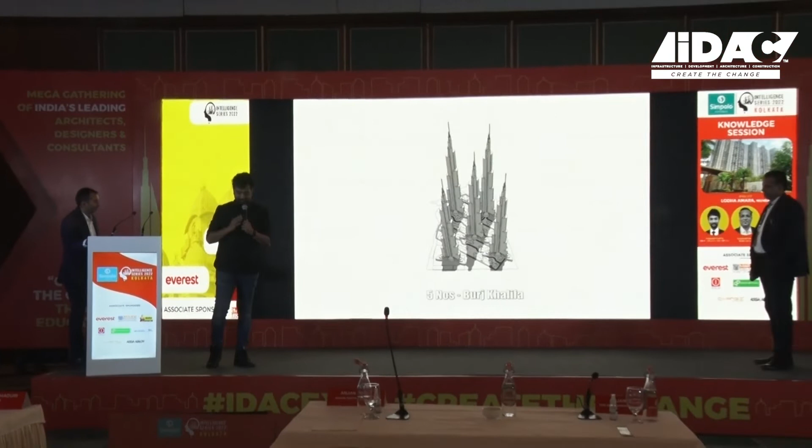We started this project in 2015. The Lodha brand is always known to give a lifestyle. You know about the World Towers, but that's a different segment. Every segment deserves the lifestyle. This is a project of our CASA brand, which means around 1 crore value. It's in Thane city, and for a better lifestyle you usually have to go 6 to 8 kilometers from the station. This is in the heart of the city. We thought every class needs the lifestyle. The price range is 75 to 100 lakhs.

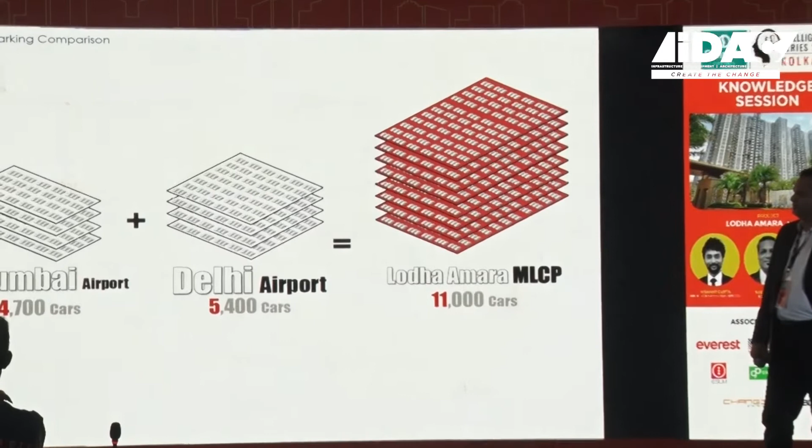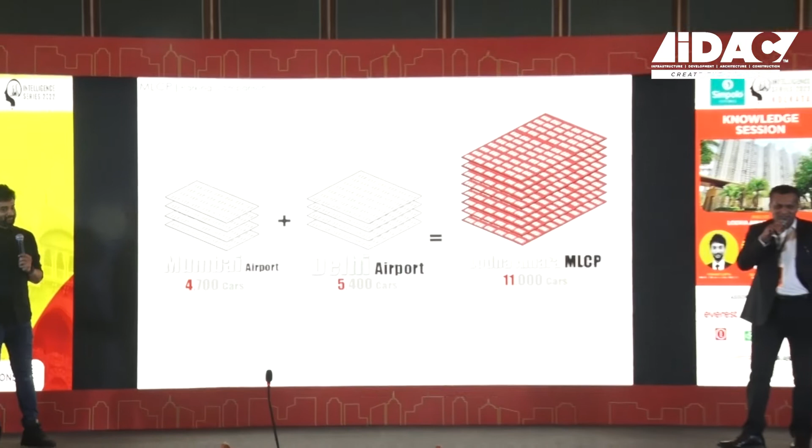Talking about scale, the car park building of this project has 11,000 cars. That is more than the car parks of Mumbai Airport and Delhi Airport put together. These are big numbers, but talking about it is one thing, doing it is another. And we gave Nishant a challenge: we can't do any basements because we want to deliver this project in 3 years. So it has to be MLCP. We don't want to dig. It's a call for ESG also.

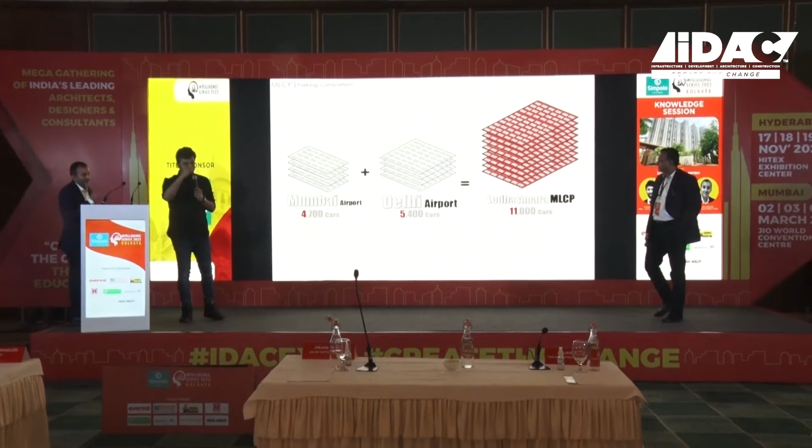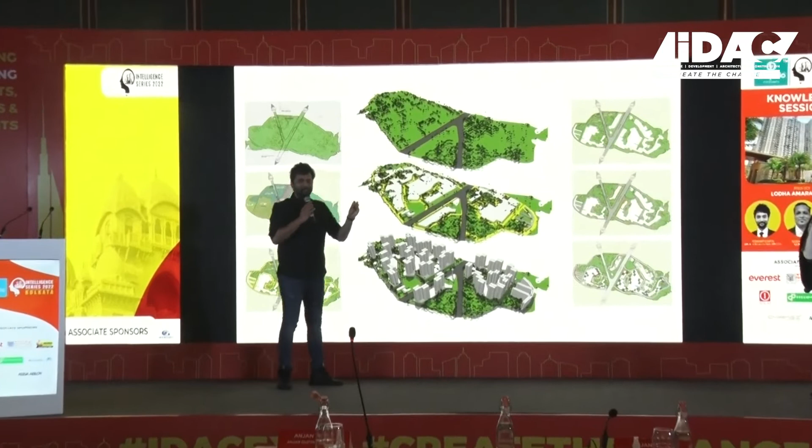Yes. So if I quickly take you through it, we got the site, which was 72 acres, we got the survey, and a brief on the type of apartments required, and we mapped it.

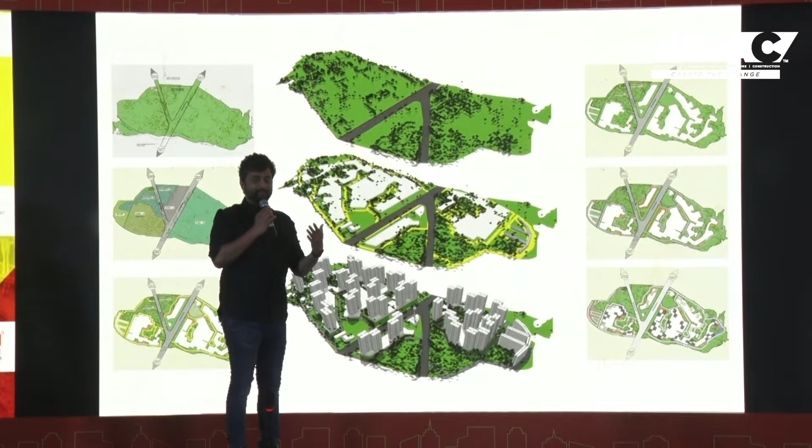Okay, these are so many trees, and the first thing that comes to your mind as an architect is the sustainability of the environment, and we want to save all the trees. Then we start getting the podium in a profile so that we don't cut any tree. Then we start placing our buildings over it, do the networking, do the drop-offs, do everything, and then show it to the client.

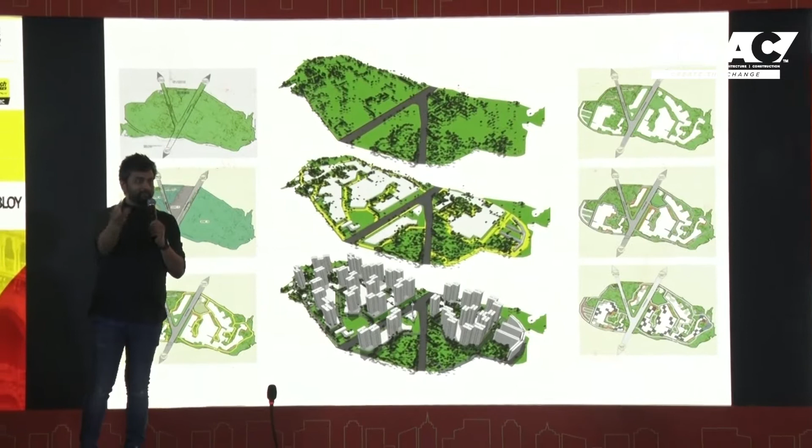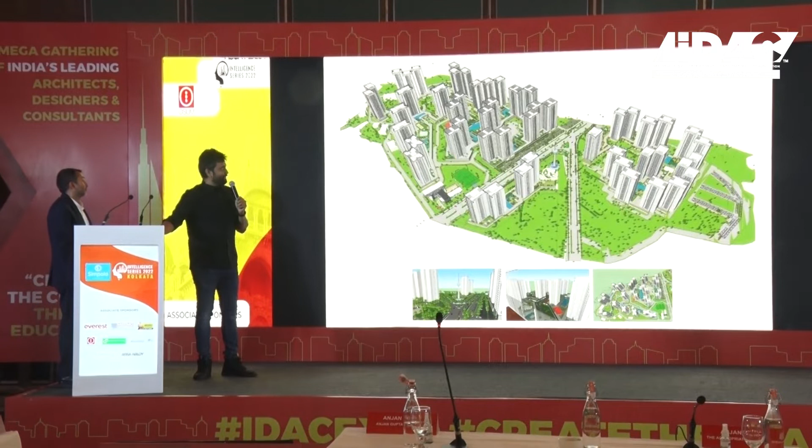We get to know the survey was slightly incorrect. All the shrubs and everything were also shown as large trees. And then it was explained that we need to work around the actual survey, and there were not really that many trees.

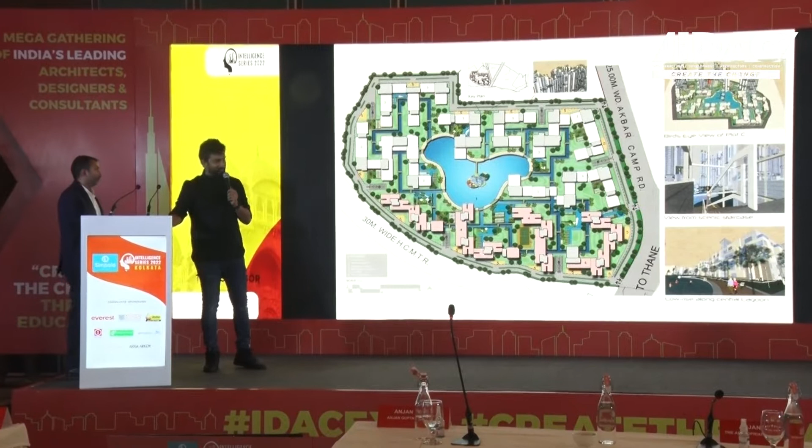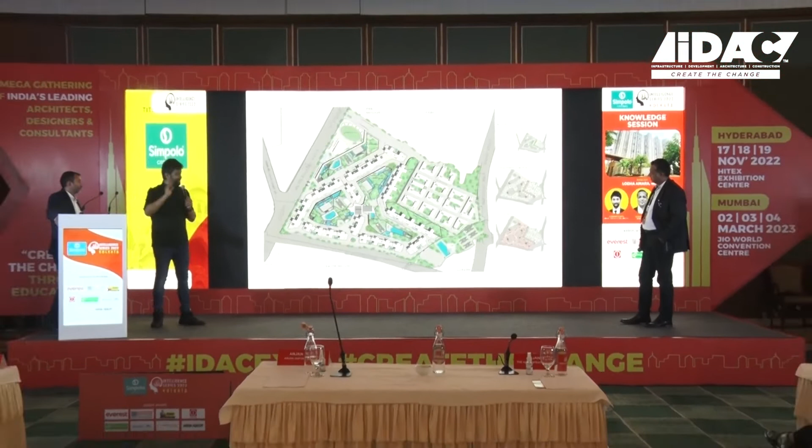Then again, we go back to the studio: okay, let's do something landmark, let's create a Venice, let's get a lot of water, because we got another brief that one sector, the smaller sector of the bigger project, should be luxury, lifestyle and all. Again, that was kicked out. Then we go back to the studio again: okay, now it has to be affordable housing. How do we do it?

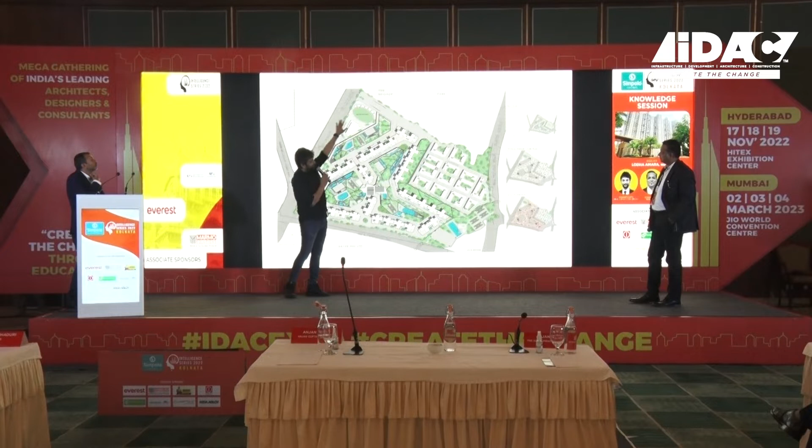Then we make 3 clusters. We have the car park building right in the center. We had an army camp on top, so there was a height limitation in this area. And then there was a social housing component to the affordable housing component. So that's how a market works. So this was the initial plan. Efficiency, everything, open spaces, I think we were fitting very well.

The remark we get from the client is, who's this architect who's done this, who watches a lot of Star Trek? Let's go with straight lines and do things which are relatively faster. And these were the initial ones. So eventually, as Sushant mentioned, delivery has to be in 30 months.

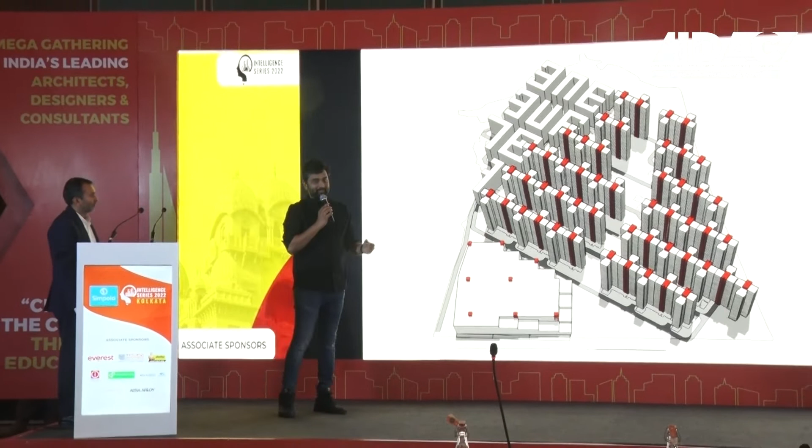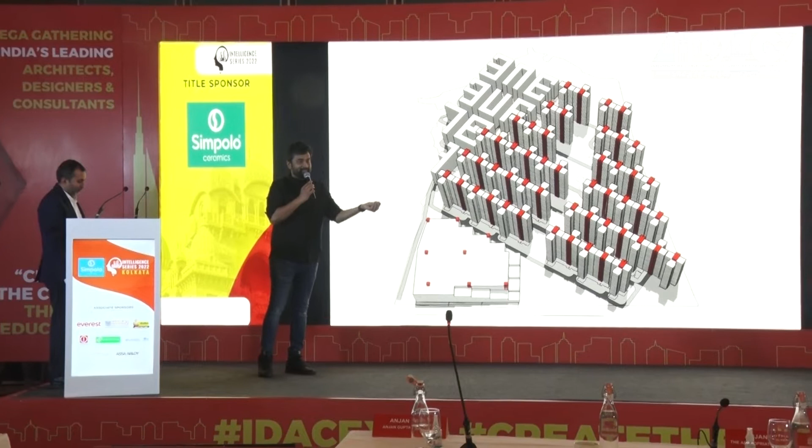Now, when delivery has to be 30 months, things have to be slightly different. The reason why I showed you the previous option is that something that got built is not the immediate response as a design; it is a process, and then there is acceptability. And sustainability is not just what my ego suggests. It's ultimately sustainability of economics also, besides social and environmental parameters.

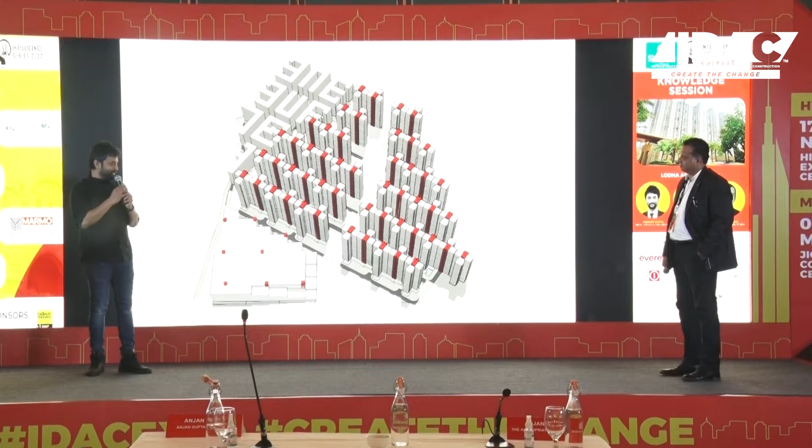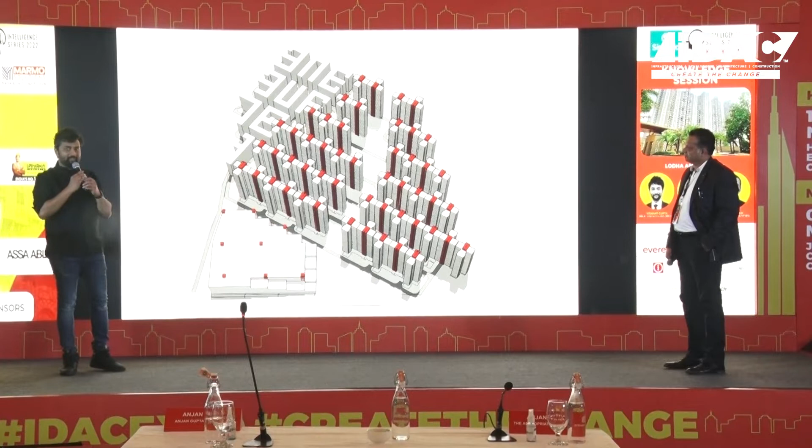And the idea was the construction has to go fast, there has to be repetition. We have to use the lowest part for the car park, and then we start building up. Buildings are 150 feet apart from each other, wherein one can see the other person, but they can't recognize the face. Then what happens is the social component goes.

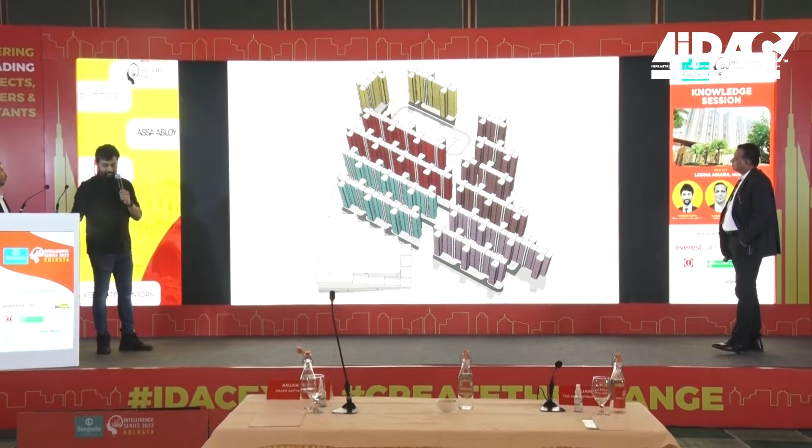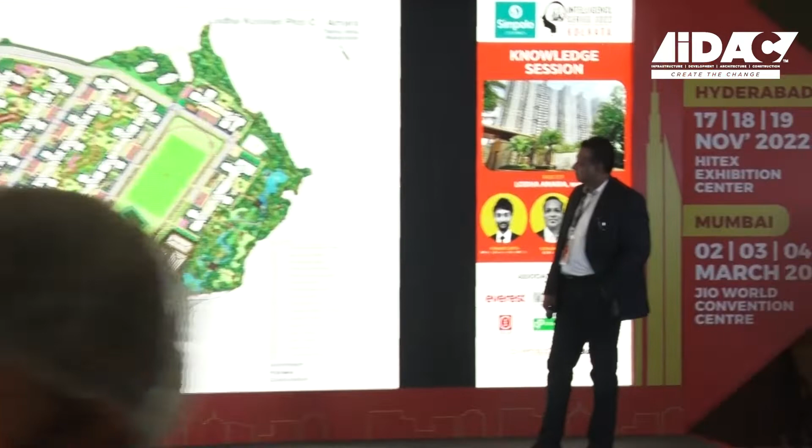The moment we grab that opportunity, we try and create an open space in the center, and then we create something like this. And then try and get the greens inside, opening up into the larger greens. And that's how ultimately the master plan came about, and everything got signed off.

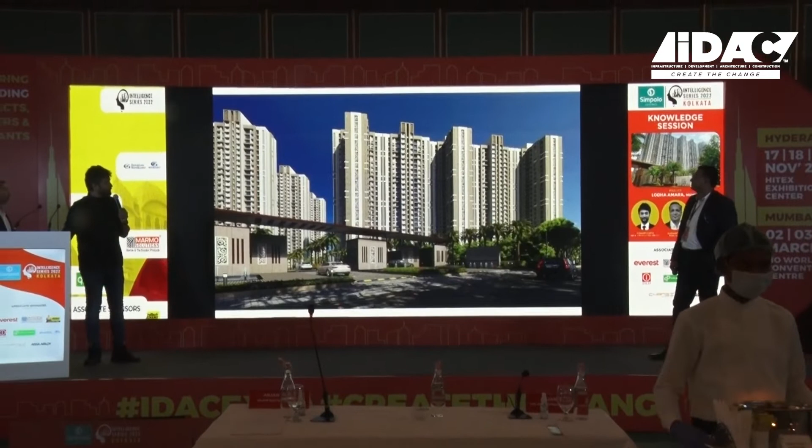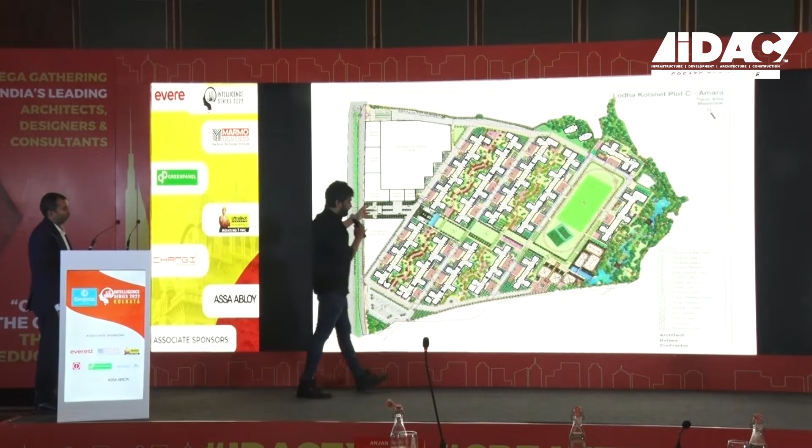And then what we thought was that we would also create a forest at the fag end of the project. We wanted to create a large 50,000 square feet club, which would be a break from this and would have a resortish feel. And this would extend into the CRZ land where we couldn't build, so create a forest.

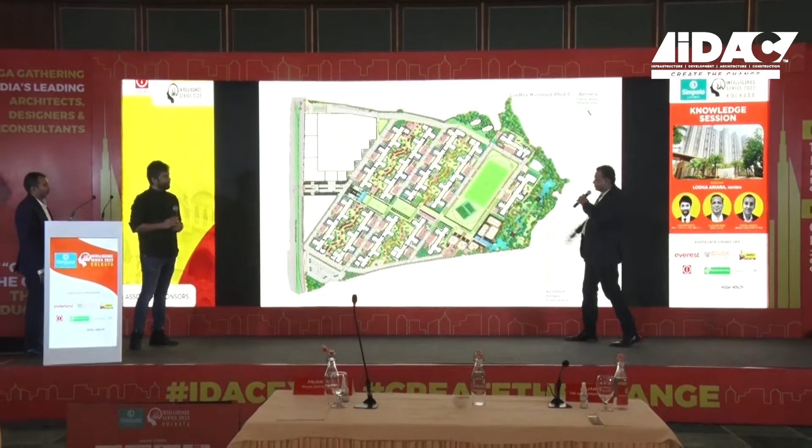So actually, if I talk about this forest thing, it's a great story. This is the land parcel which you see. This is 7.8 acres, and there were some trees because it was industrial land before. But we created a good landscape within the existing trees, and had some more trees planted there. And actually, we made it a big selling point: a forest inside your house. So you can just come and enjoy the forest.

And after COVID, if you notice, people now actually know the importance of these green areas. After COVID, after 2-3 months, when the restrictions were removed a little bit, people really enjoyed it, and we got good feedback from our HPM team from the Amara residents. Yeah. And all these buildings that you see are pervious at the ground floor.

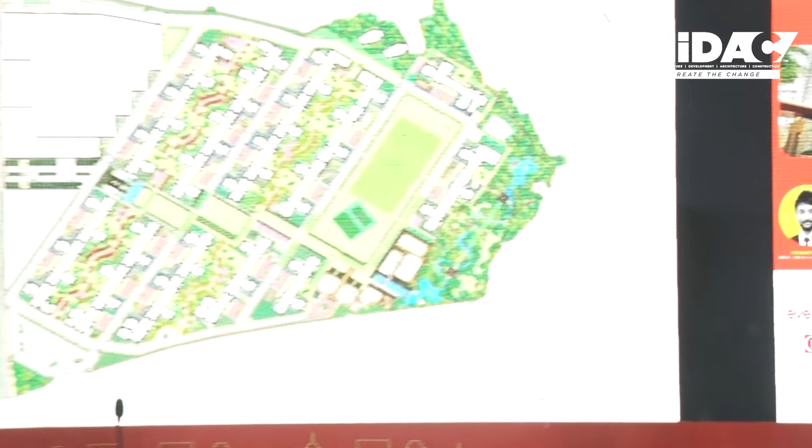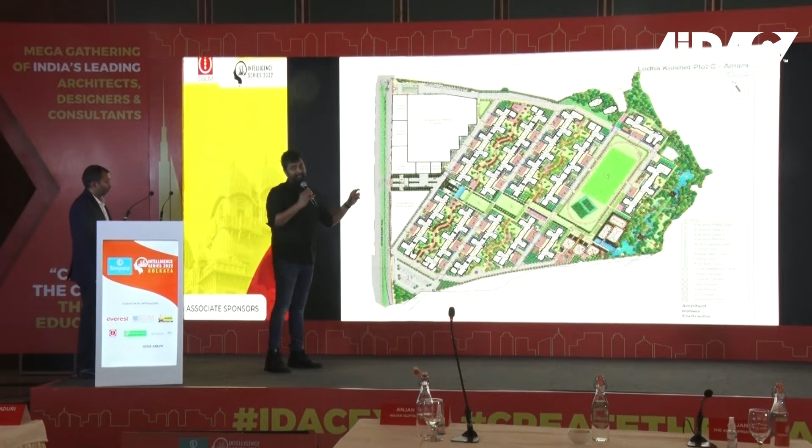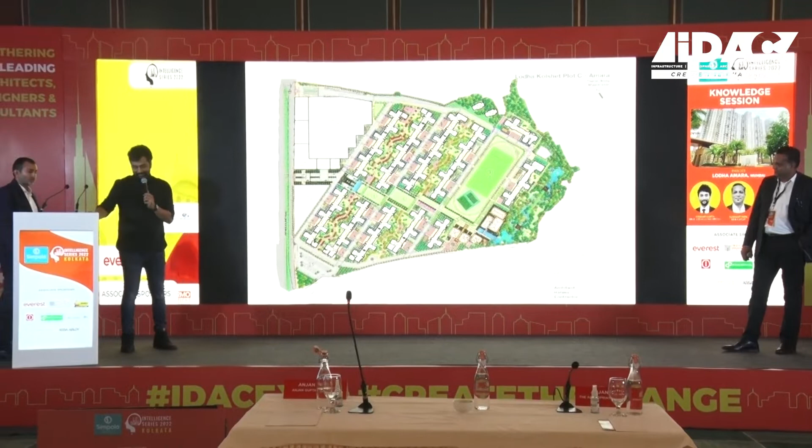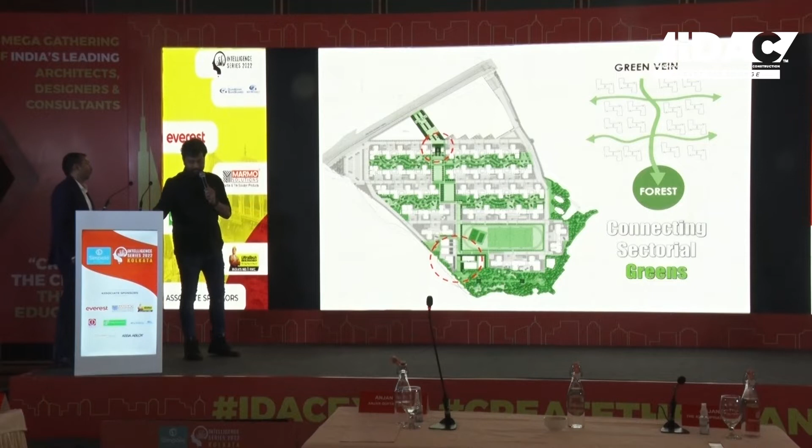You're left with a certain area, and that is when, where, and how, and what you do sort of defines the project. So these were some initial visuals. These were the last. So this is how we created the green vein going into each pocket. And then these were the pervious lobbies that one can walk from one side to the other.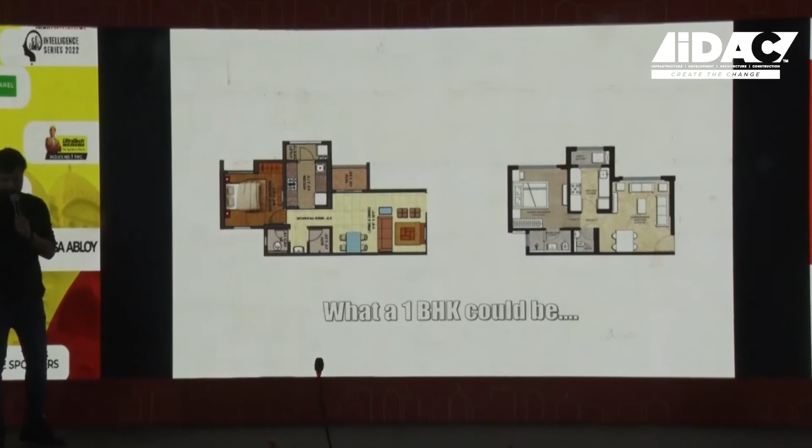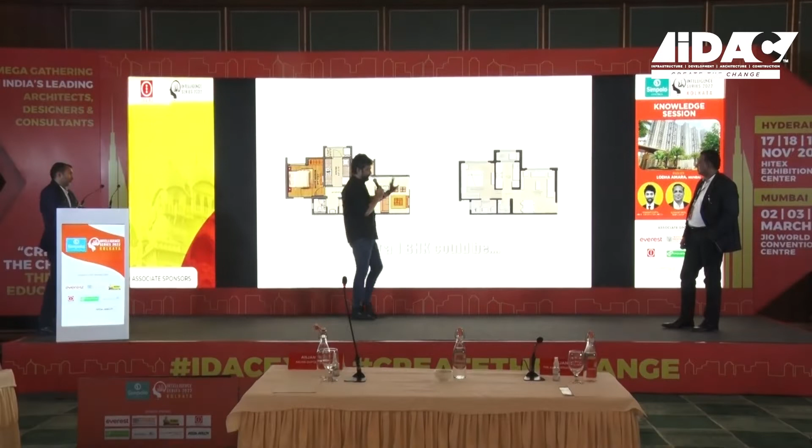So now, you come to a product, what a 1 BHK has to be. So in general, this is what we are talking in 2012-13, when we started designing. A 1 BHK used to be a 480 square feet product. 480 square feet, we brought it down to a 415 square feet, 400 square feet product, wherein we provided 2 toilets. This was the existing product. This is the product that we made.

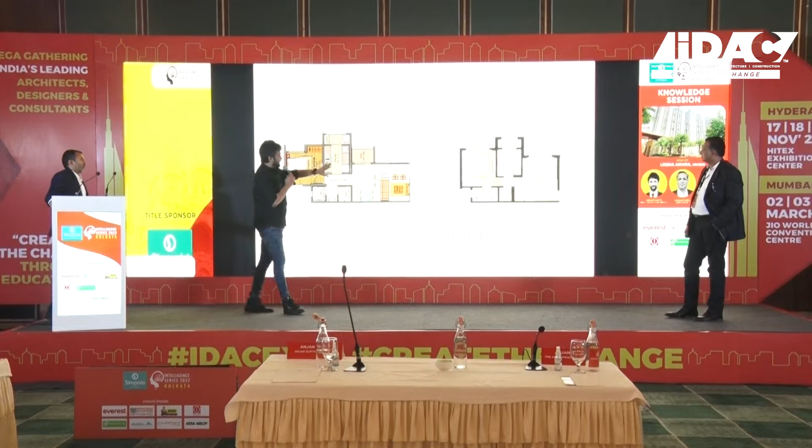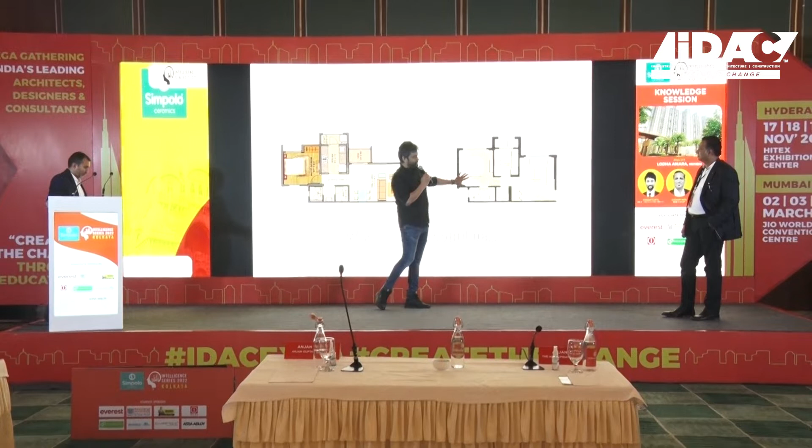Now, what would happen is that you load that extra 15% area. So a house, let's say, comes for 75 lakh. The same area, you get better room sizes, you get better utilization of space, and you get the same thing in 60 lakh. So that is the kind of intervention through design I think an architect can really give.

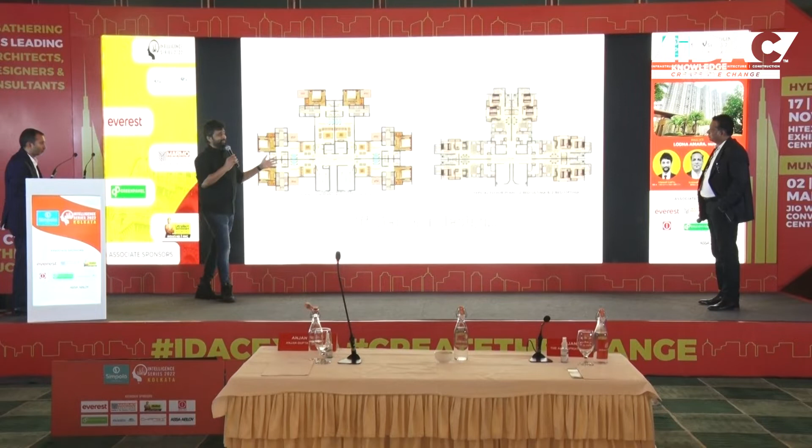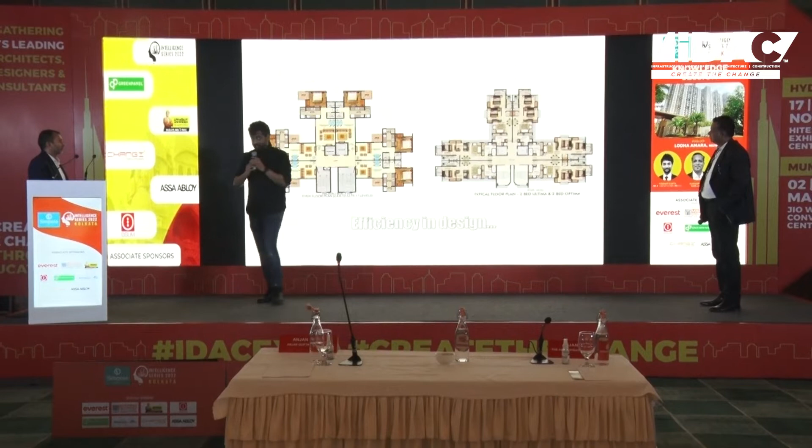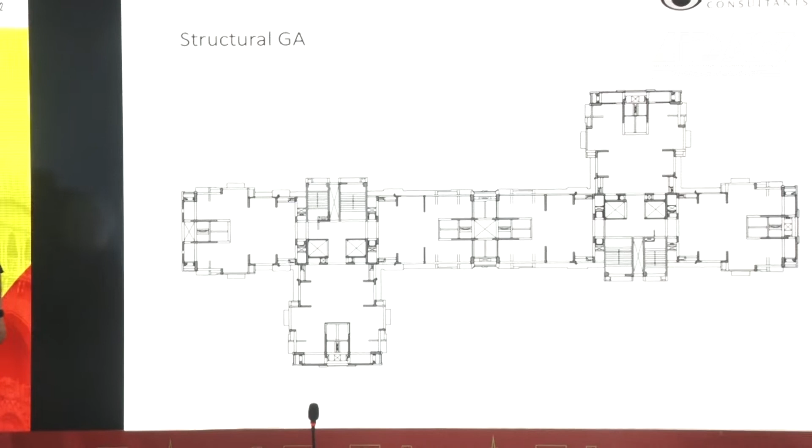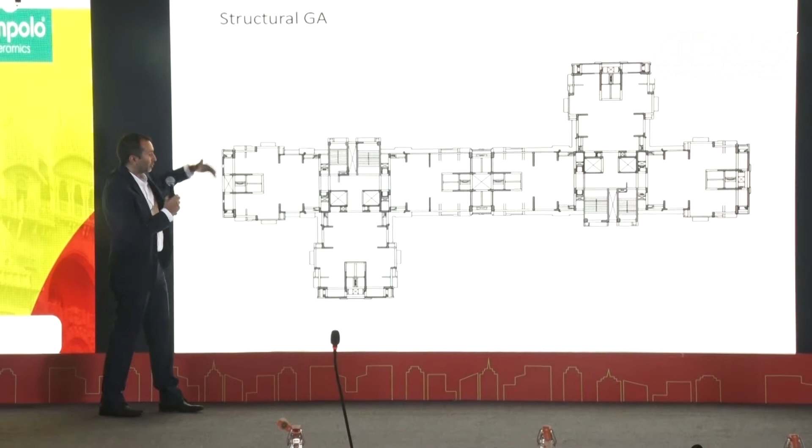So this is the structural plan of the building. Architecturally, it was a single T, but structurally, we had to join the T's to give it the base width, so that we could reduce the forces on the shear walls. This is the shear core of the building, which is a fairly rectangular core, and this helped us achieve a lot of efficiency. The client also wanted to create a flat which could be merged very, very easily.

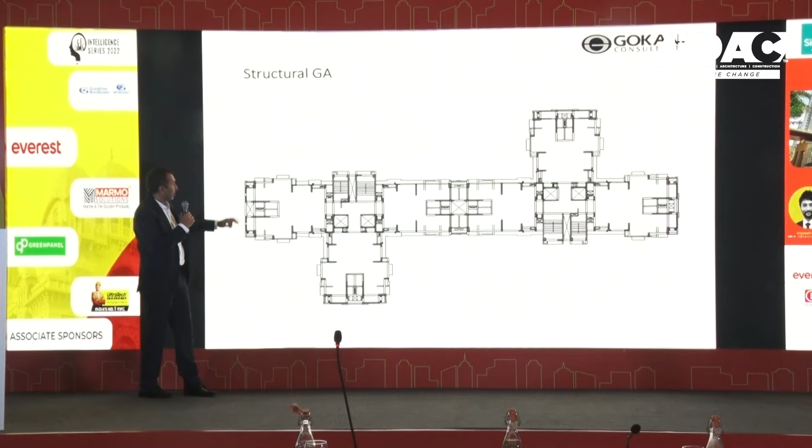Flat slabs are generally frowned upon in the Indian standards, but with the help of these beams, we could create kind of a pseudo flat slab, which is not really a flat slab, but it looks like a flat slab. And all these columns are just along the periphery of the flats. Even then, this dimension is about 4 to 4.5 meters.

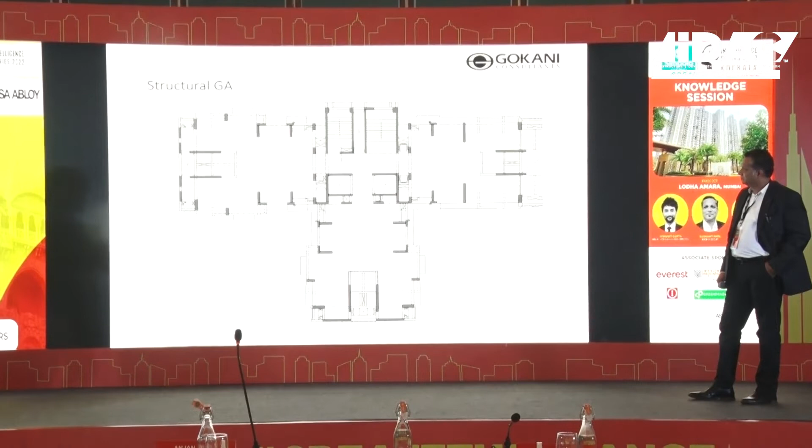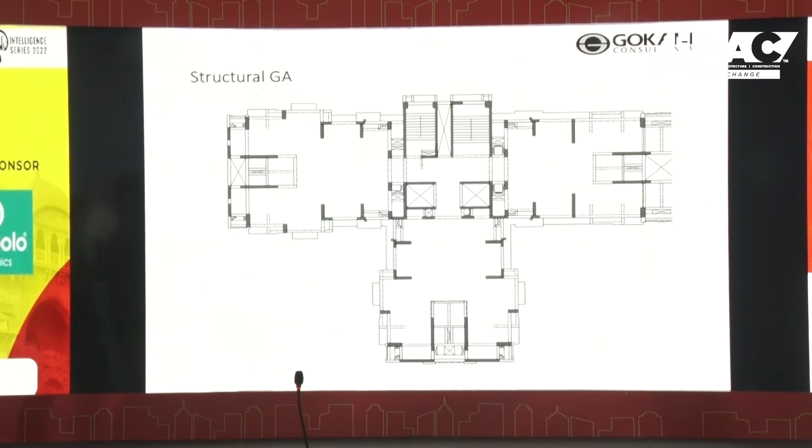So this is just the zoomed-in version of one of the floor plans, where you can easily see the structural system. These columns here are a part of the vertical load resisting elements, and only the shear wall core takes the lateral loads. Also what is happening is that previously, a T-shaped building is not good for torsion, as structural engineers, everybody understands.

But now we're getting a little more FSI on the existing FSI, so we're going for a more rectangular central core for the last few buildings. Nishant and his team helped us to get this very rectangular central core, which was the key to achieving the efficiency that we talked about. And efficiency not only in terms of cost, but also in terms of flexibility in the planning.

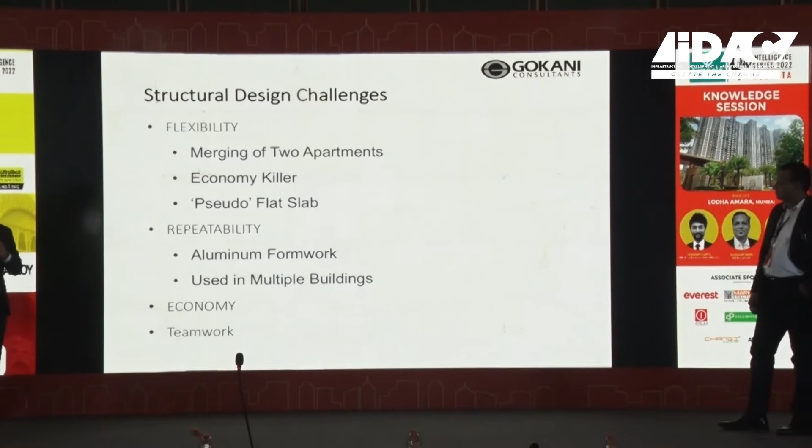And the other main important aspect was the repeatability. So how the buildings were designed was there was a central core, and there were different unit configurations that came together. And these had to be joined on the same core. So there were 5, 7, 10 different types of buildings structurally. And because of this kind of a planning, we could achieve that repeatability, and we could use aluminum formwork in a very efficient way throughout the buildings.

Well, flexibility and repeatability sometimes are economic killers, because you want larger spans. But with the help of Nishant and his team, we could achieve the economy. So I'll just run through how we achieved the economy. One of the most important aspects of achieving the economy was the structural configuration. As I earlier pointed out, even though the building is a T shape, we had to join the two inverted T's together to widen the base of the building, which would result in lower forces in the shear walls.

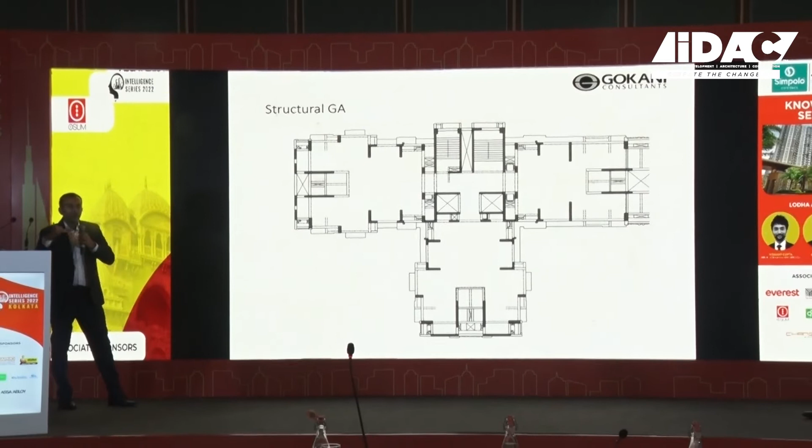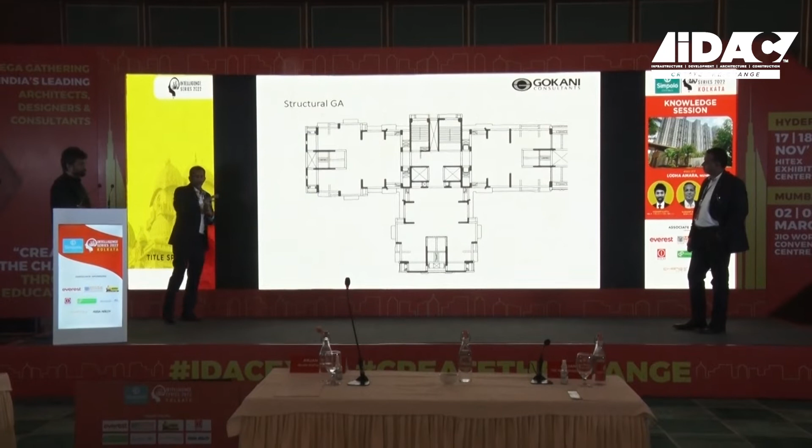The second important aspect is the shear wall massing. Just like massing is very important in architecture, where you place the shear walls in the building is very important. So if you take the shear wall core that we just showed you, and you just messed up the shear wall elements and placed them haphazardly, the building would have been much less efficient. Just because we could align this core and align these columns, we could achieve a very efficient way of placing these shear walls.

The other aspect was we fine-tuned the lateral load elements, which are the elements that take the wind and earthquake load. So we fine-tuned the elements so that nothing more than required was put in, and this required a lot of iterations and optimizations from our end. Lateral load elements require a lot of detailing with respect to RCC, which is again an economic killer. So we tried to use some gravity elements within the system which are penalized less in the codal provisions. They also provide you flexibility along the flats and reduce the column sizes over there too.

We tried to reduce the spans. If you see the layout, along the periphery, the spans are not more than 4 to 5 meters maximum. Even though it looks like a big flat slab, we could reduce the spans along the periphery and still achieve the flexibility. And we also optimized the concrete. In a 30-story building, we went up to as high as M50 grade concrete, and we could reduce the size of the elements and the reinforcement that we put in.

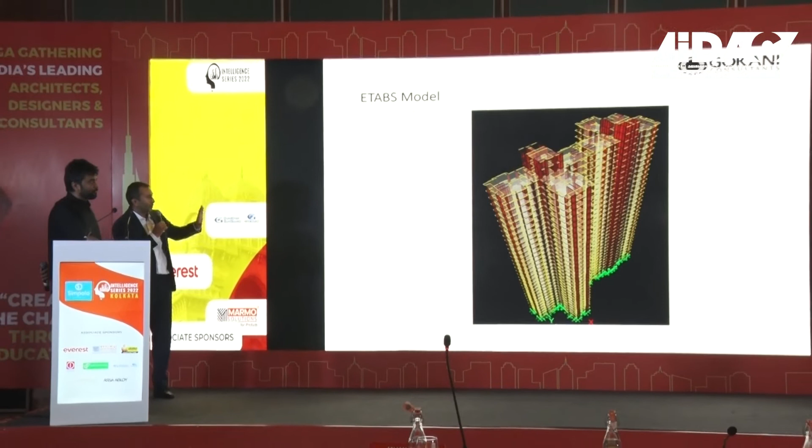And the consumption, taking into account all the codal provisions and everything, for a 30-story building came to 3.9 kgs per square feet or 0.033 cubic meters per square feet. So this is a fairly decent consumption. And this is the ETABS model that we used for the building for our optimizations, which helped us achieve the goals of the project.

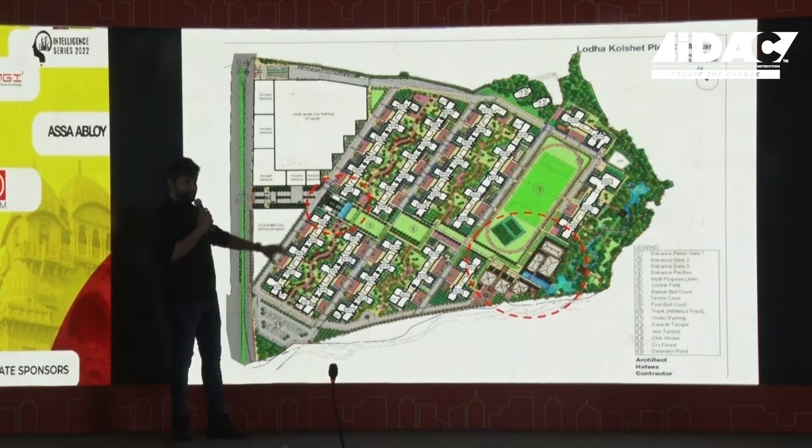So to maintain economy, everything was separate, in the sense one set of contractors was given one row, another set was given another row. We had the underground water tanks 6 meters away from the building. So there's a separate contractor doing the water tank, a separate contractor doing the buildings, a separate contractor doing the STP. So every task was nicely engineered at the site, so that this whole mass housing project could be delivered.

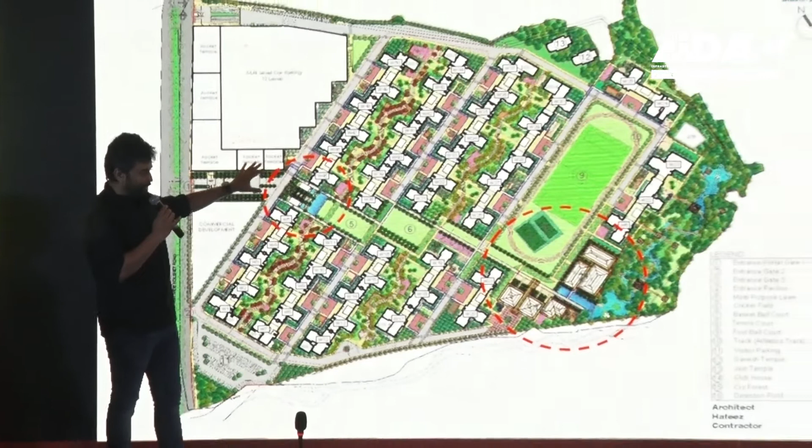Now, as an architect, you are then only left with the nodes that you could create for all these people that would come. And then we created a gesture here. We created a pavilion here. And then, like I was explaining earlier, a breakaway, a transition into the forest. We created a club at the end of the project. So as you arrive at the project, this is the kind of portal that we created, and now we are hiring an artist to get a suspended artwork into this gateway. This gateway takes you to that central green, and it extends into the overall project. And on either side, you have the buildings that you see.

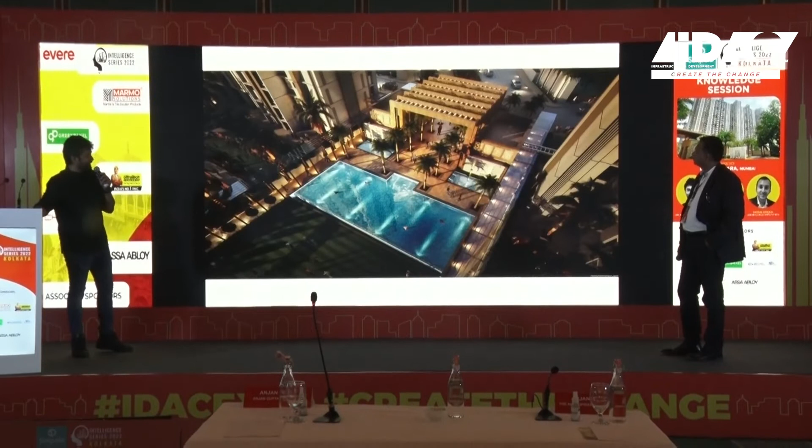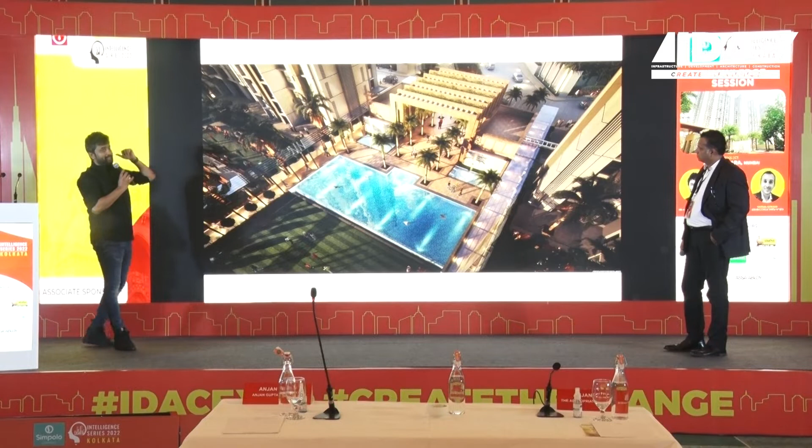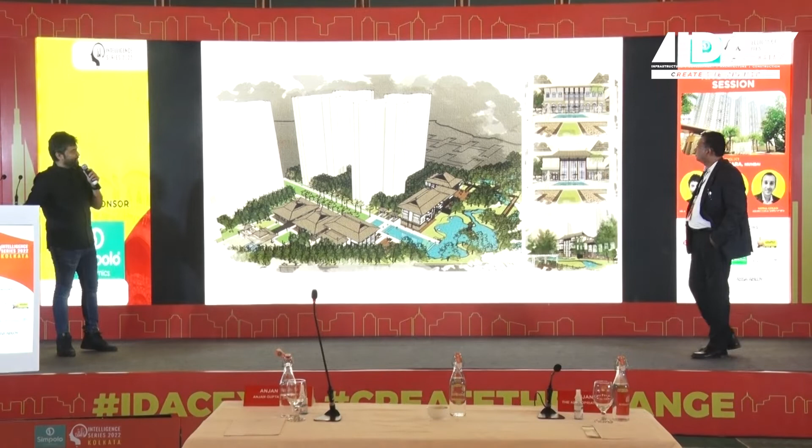Now this is when you see it from the central green side: through that gateway comes a swimming pool, and then the garden starts extending. There are covered walkways for people coming out from the car park building and going to their own residences. The maximum distance from the MLCP to your apartment is not more than 500 meters, which is a walkable 5 minutes. Then we tried multiple options of what the style of the clubhouse should be, and we discussed multiple styles of how we should do it.

And ultimately, this gymkhana kind of a feel got approved. And these were initial visuals of our ideas. And the finished pictures, I think I'll let Sushant scroll through. And then we created the idea of the overall project. I'll show you the visuals, how we perceived it, and how it became.

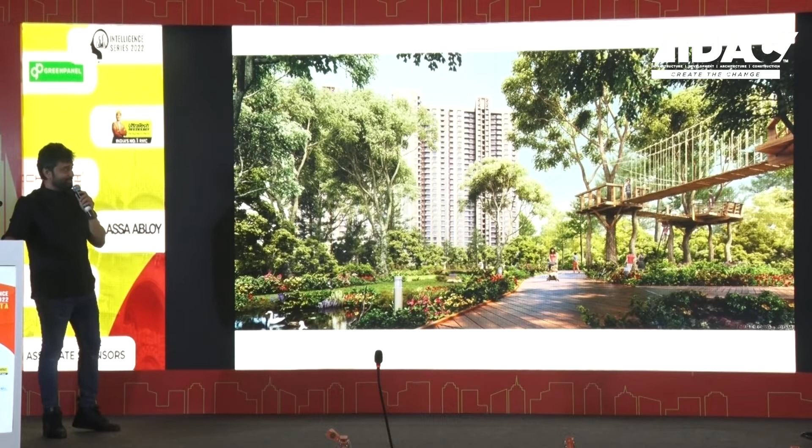I think we wanted to create trails, forest trails. We wanted to create tree houses. So it's a real immersive forest that we have created. So these are visuals, and then we'll show you the ultimate picture. So with all these visuals, we went to Abhishek Lodha's office, and we made a fantastic presentation. Everybody's charged up.

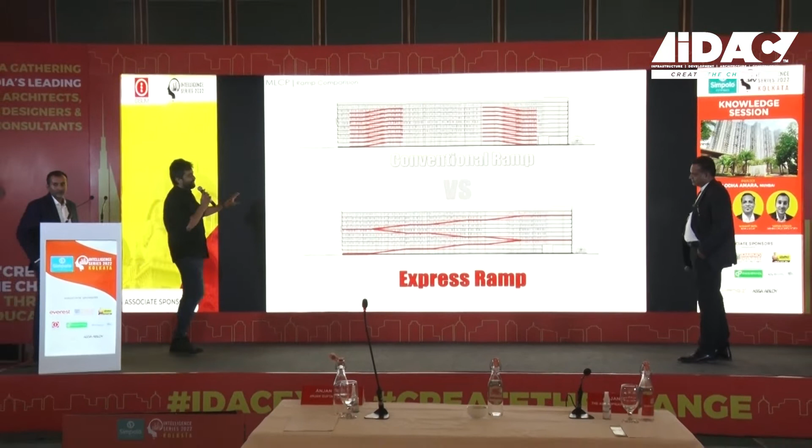Last, I think I'll just cover a very interesting aspect of doing a car park building, which is that we are talking about a massive building. Everybody would be wondering that you have a 12-story car park building. Now, imagine Bombay, people are adapted to going to a 10-story podium, but each time you sort of keep swirling and go up. So you'll be like, okay, boss, I don't want to go up. I might as well not have a car.

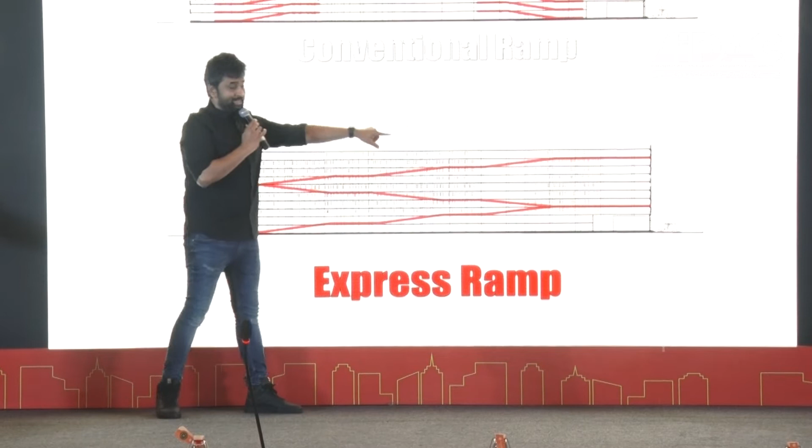So here we devised a technique wherein we had the length. So as we entered the project, we made an express ramp. So you'll go one level up, get into it, go second level up, get into it, go to third level up, take a turn, go 3 levels up again, and then go 3 levels up again. So even if you're parked on the 12th level, you'll only turn twice. So through that kind of intervention through design, instead of doing a conventional ramp, we were able to beat it. So this was, I think, a great feat.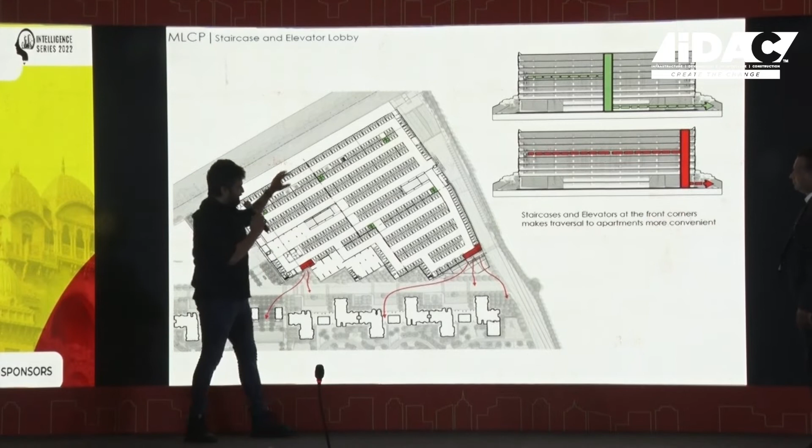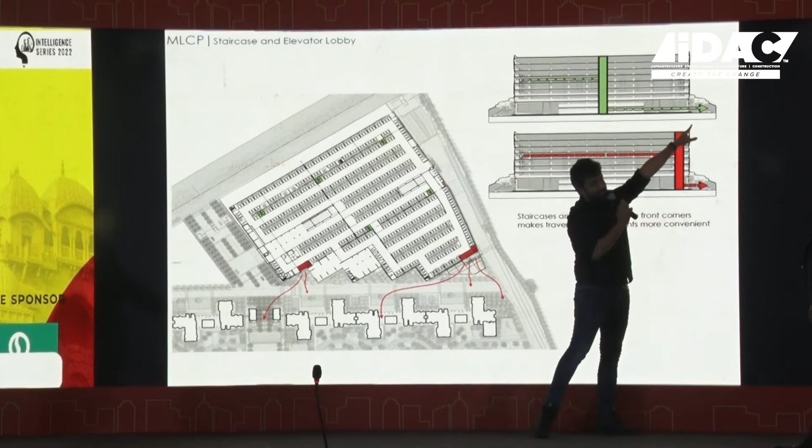The second thing, we convinced the client to have the lobbies at the end of the car parking building. There was a whole argument, we should have lifts just everywhere, lifts along the staircases. But one option is that you take a lift which is closest to you, get down on the ground floor, then again walk through the parking and get out. The second option is that wherever you park, you travel on your same floor, get down on the corner, and directly enter into the project. So you're not traveling twice in the car park jungle. Nobody likes that experience.

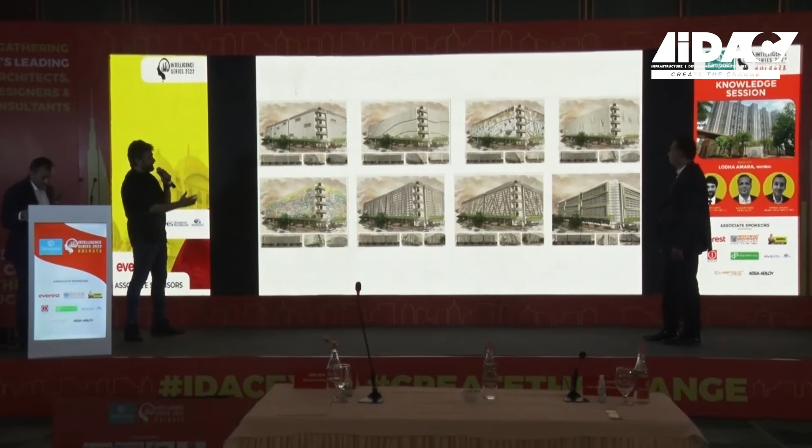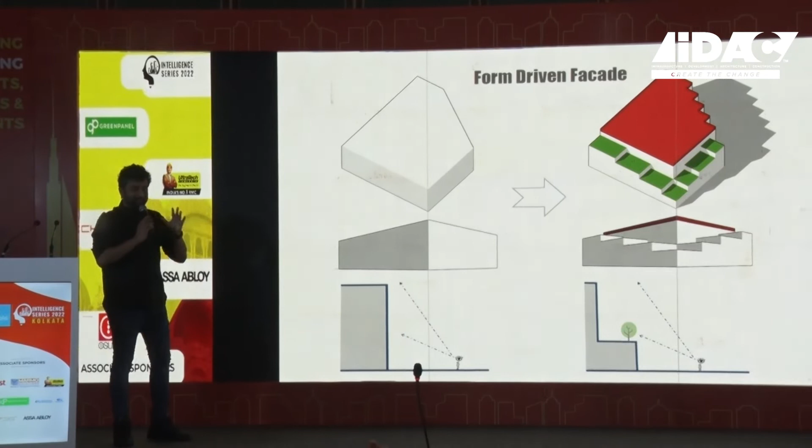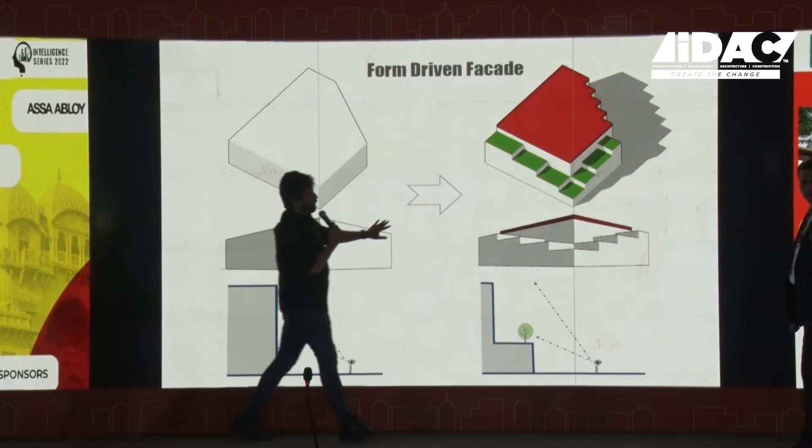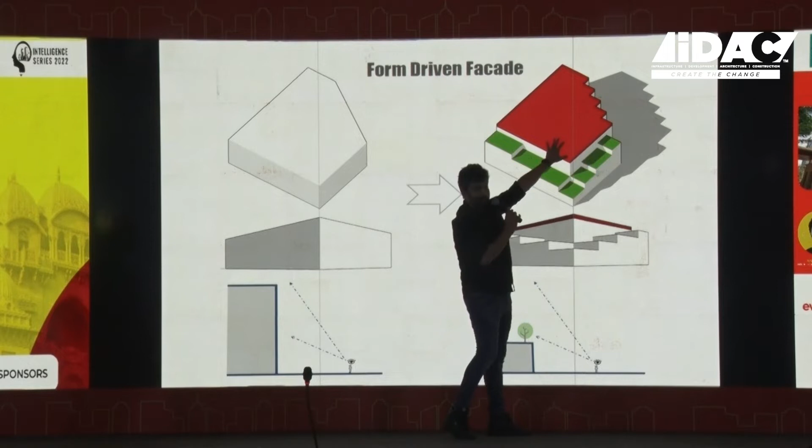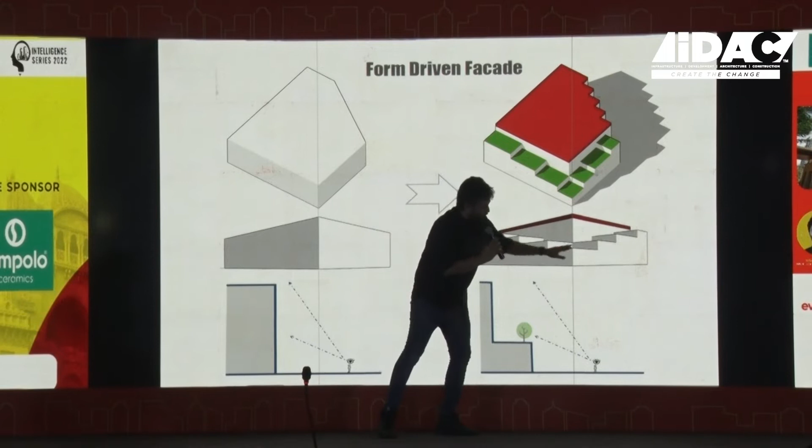So all we did was, can you let us make this kind of a stepping in the car park building? And whatever we have subtracted from here, we just add another floor. So in terms of structural engineering, his reinforcement is not really going high because he's just adding another floor, right? But at the same time, as an architect, I've got that soft form as I enter the project. So that is the intervention, as I was not allowed to do any facade treatment. That is the maximum one could do as a form.

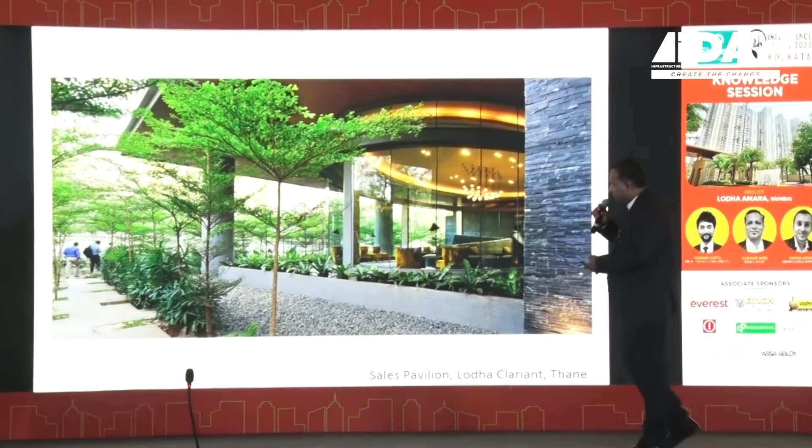And then lastly, we said, okay, let us at least have markers to see which floor it is. And you would see the soffits from below, a whole VIBGYOR of colors with that step profile. Over to you with the finished product. So this was a structure which was already there as an industrial one. We use it for our sales office.

Which one? Just the last 2 minutes. I think you can go next. I'll show you the actual pictures.

These are some show flats we did for sale purposes. This is the entry, an actual photograph. This is what you can see here.

We retained all the trees wherever possible on the periphery. We had a very subtle color palette. Next, this is the pool.

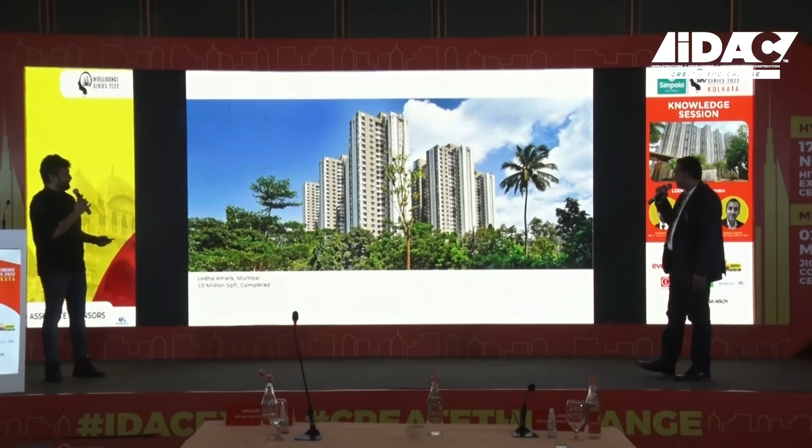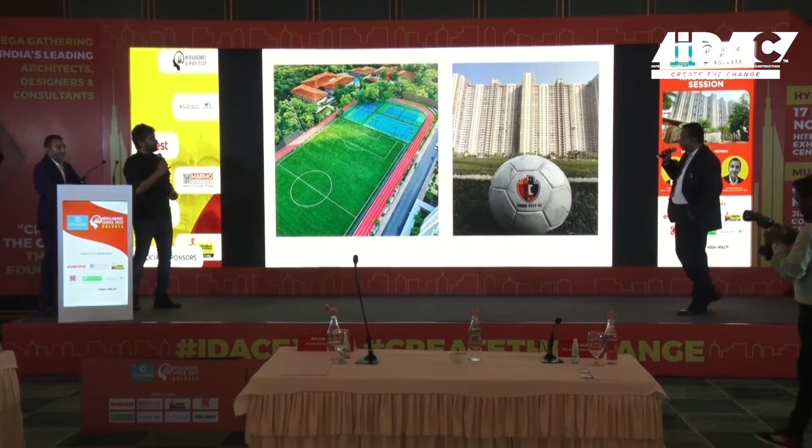Nishant showed some 3D renderings earlier, but these are the actual ones. We have a lot of amenities, including a sports arena - this is an actual picture. We have 2.8 acres of land under the sports arena.

We have a football field, two tennis courts, one multi-purpose court, a 400 meter 4-lane athletic track, and there are also areas for cricket and other sports.

We have an 80-seater theater, a full health club, gym, and restaurants. We have 4 swimming pools because the total number of units is 8,500. We also have a party hall and everything else.

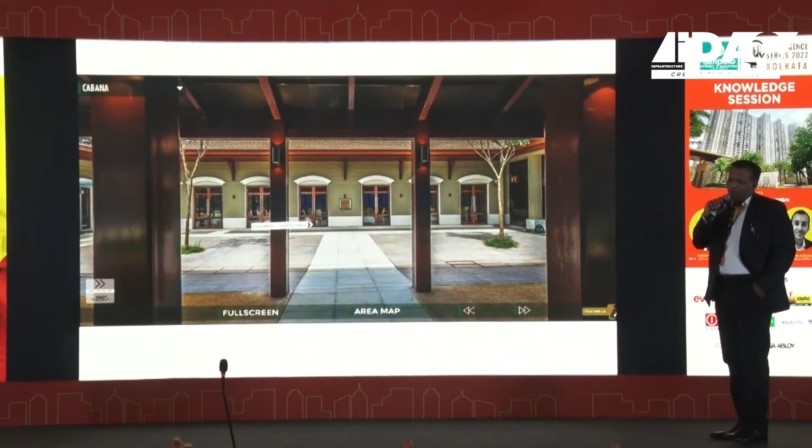So whatever you think of as high-end luxury amenities, each and everything is provided at an affordable rate. This is the actual picture of the swimming pool.

This model also lives at 75 lakhs, which is really affordable. The idea is that when we say affordable, it doesn't mean we don't make it aspirational. Every time an affordable house is branded as 'this yojana, that yojana,' if you start marketing it like that...

This is the indoor temperature-controlled pool, an actual picture.

Now this is the forest area, and I love going there. Whenever I'm at Amara, I visit this and take a walk. It's nice to roam around in this 2.7 acre land. These are all the forest trails in the forest area, and I think this is a real place of joy for the 10,000 families.

And of course, this is more of a developer slide, but we've got a temple as well. So, I think that's about it.

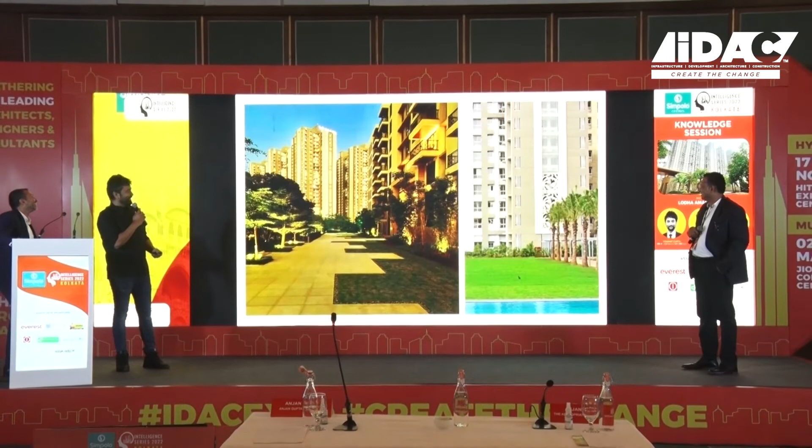Across the street, it's a large master plan - the other development, Sterling, is also done, which is low-lying at 24 meters. These are more luxurious and have courtyards.

As I said, this is the area where if you want to buy a house, it's around 2+ crore. But here we created the 75 lakh houses. Across this, we had this London Living, which is the high-end one, and also affordable housing, and then we created some affordable offices of about 200 square feet.

This affordable housing concept is what we started in 2020 after COVID, when people felt the need for 'walk to home, walk to work.' There are so many startups who want smaller offices of 200 to 300 square feet. I can stay in Amara and go to my office - no need to travel.

That's where we got this product, because we had a small land parcel attached to the road, which was previously not under development, but later we got those restrictions removed. That's something we started in 2020, and we created small terraces with each of these small units. So that's about it, thank you.